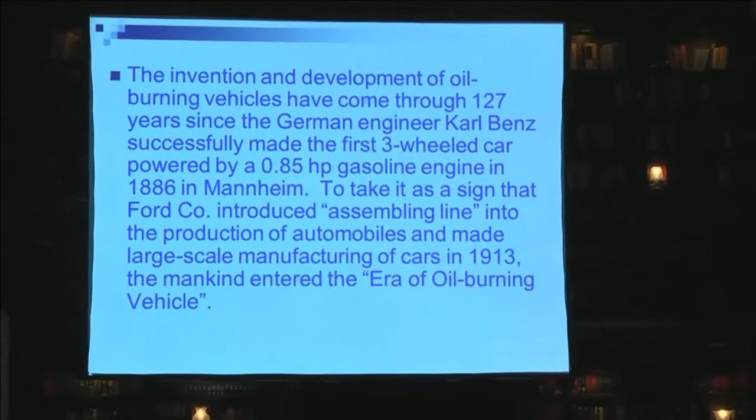Thank you. Creating a new era of alcohol ether fuel vehicles, by Mr. Peng Zhigui. The invention and development of oil-burning vehicles have come through 127 years since the German engineer Karl Benz successfully made the first three-wheeled car powered by a 0.85 HP gasoline engine in 1886 in Mannheim. To take it as a sign that Ford company introduced the assembly line into the production of automobiles and made large-scale manufacturing of cars in 1913. Mankind entered the era of oil-burning vehicles.

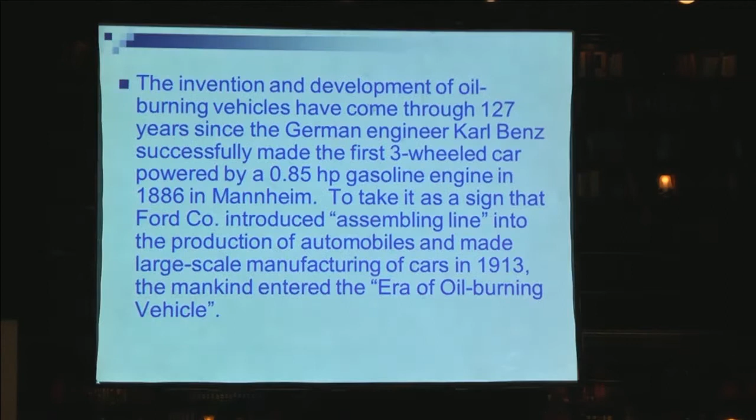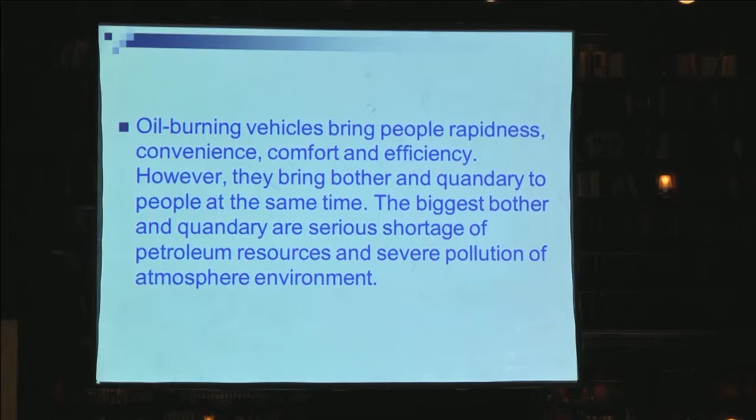At the present time, automobiles have become necessary to people's life and work, as well as high-grade, durable consumables and artworks loved by everybody. The automobile industry has become a skeleton industry of the national economy in many countries. Oil-burning vehicles bring people rapidness, convenience, comfort, and efficiency. However, they bring bother and quandary to people at the same time. The biggest bother and quandary are serious shortage of petroleum resources and severe pollution of the atmosphere environment.

Nowadays, every country is trying to create a peaceful, stable, prosperous, and harmonious era. There should be a clean and beautiful environment for mankind living in that era. Therefore, clean vehicles are a need of the times as well as a need of the people. Chapter 1: Alternate vehicle fuels beauty contest.

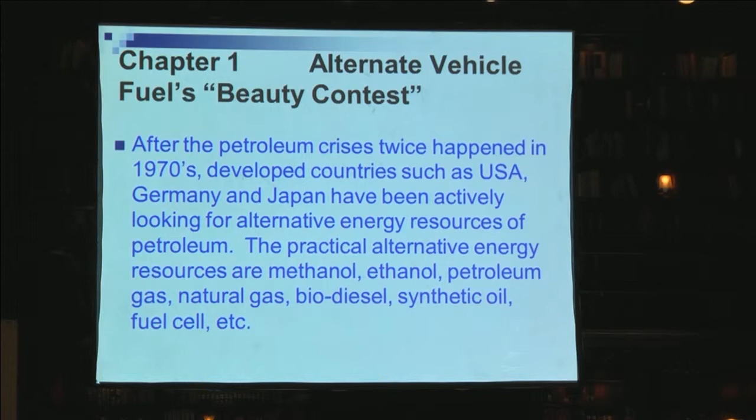After the petroleum crises happened twice in the 1970s, developed countries such as the USA, Germany, and Japan have been actively looking for alternative energy resources to petroleum. The practical alternative energy resources are methanol, ethanol, petroleum gas, natural gas, biodiesel, synthetic oil, fuel cell, and so on. Scientists and engineers in relatively developed countries had made a great number of tests, research, technological innovation, demonstrations, and application promotion, and got remarkable results.

Because petroleum resources are much shorter in our country, the enthusiasm for seeking alternative energy resources is very high. The state government chose ethanol first and made demonstrations and promotion in the late 1990s in 3 provinces. The Shanxi provincial government chose methanol and made test demonstrations and promotion across the whole province.

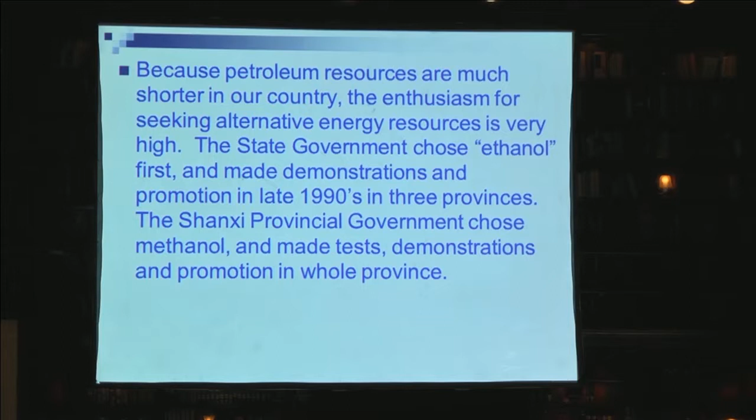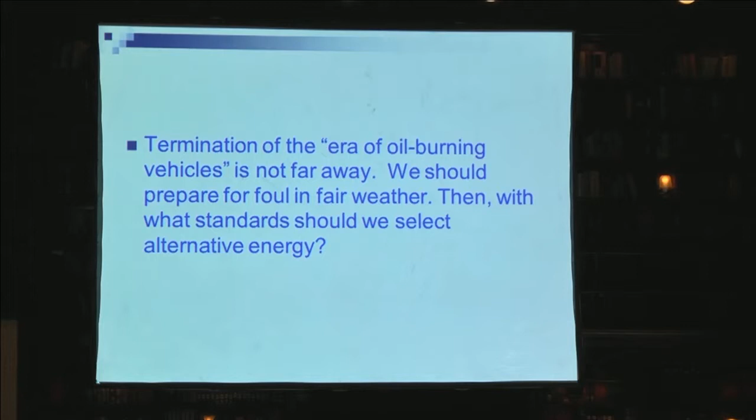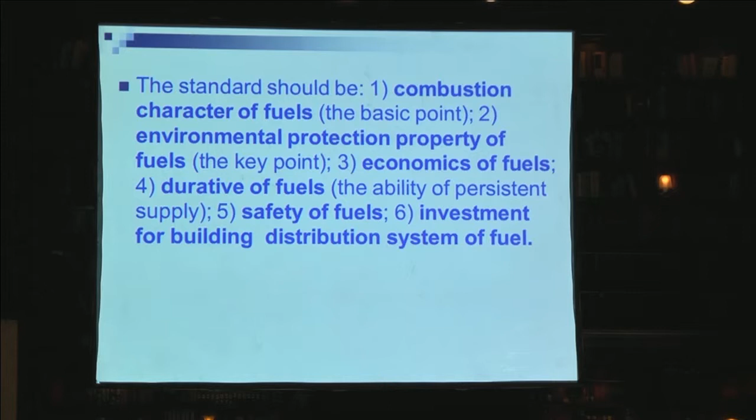Termination of the era of oil-burning vehicles is not far away. We should prepare for foul in fair weather. Then, with what standards should we select alternative energy? The standards should be: first, combustion character of fuel; second, environmental protection property of fuel; third, economics of fuel; fourth, durative of fuel; fifth, safety of fuel; sixth, investment for building the distribution system of fuel.

We have been working with alternative fuels for more than 20 years. It is not so difficult to make a selection. We will borrow the method of a beauty contest from the art circle to compare, identify, and evaluate vehicle fuels. It can be called an alternative vehicle fuels beauty contest.

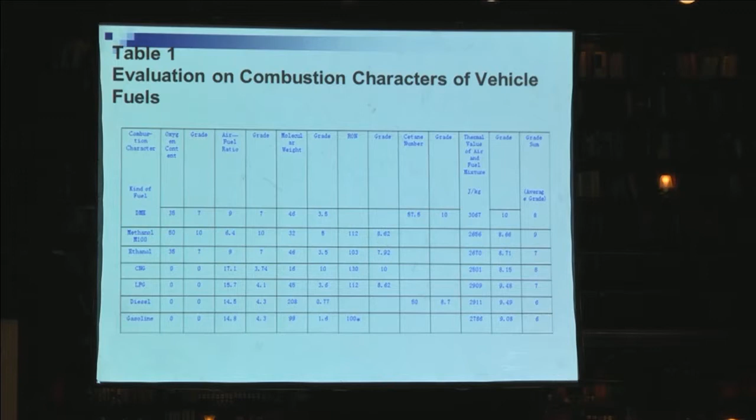Here are some tables in which we make an evaluation of different characters of vehicle fuels. This is table 1. In the first column we can see different kinds of fuel: DME, methanol (M100), ethanol, CNG, LPG, diesel, and gasoline. The different columns show different characters. Because I don't have much time to explain all these details, you can see this table is an evaluation of combustion characters of vehicle fuels. The second table is an evaluation of environmental protection property of vehicle fuels.

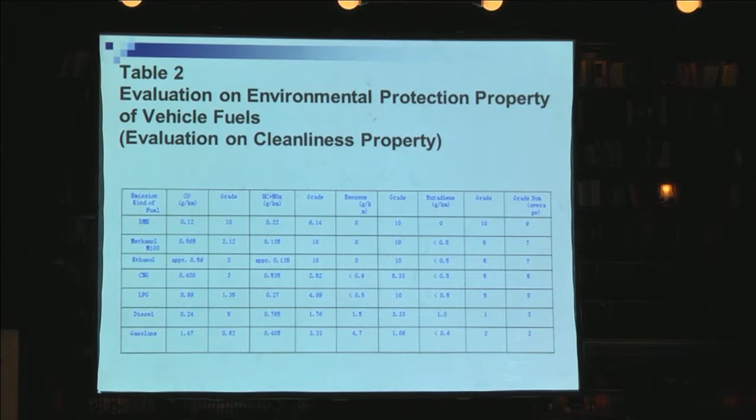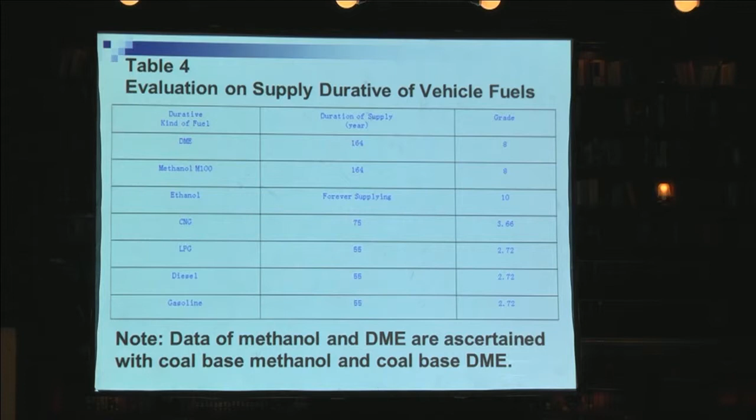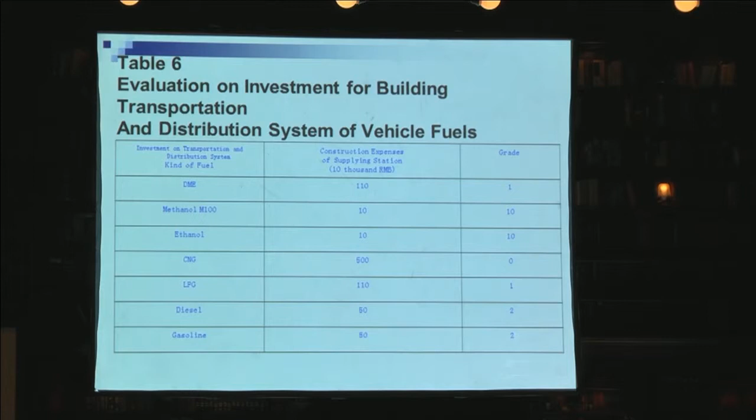Table 3 is evaluation of economics of vehicle fuel. Table 4 is evaluation on supply durability of vehicle fuel. Table 5 is evaluation on safety of vehicle fuel. Table 6 is evaluation of investment for building transportation and distribution systems of vehicle fuel. Table 7 is general evaluation of vehicle fuel.

We give different grades. We can see in the first column the different kinds of fuels, and in the next columns, different characteristics of fuels. At last, we can see the total grade.

In the last column, we can see for DME it is 37, for methanol it is 54, for ethanol it is 47, CNG is 31, and LPG is 26. For diesel it is 20, for gasoline it is 21. So we can see methanol got the highest grade, a score of 54.

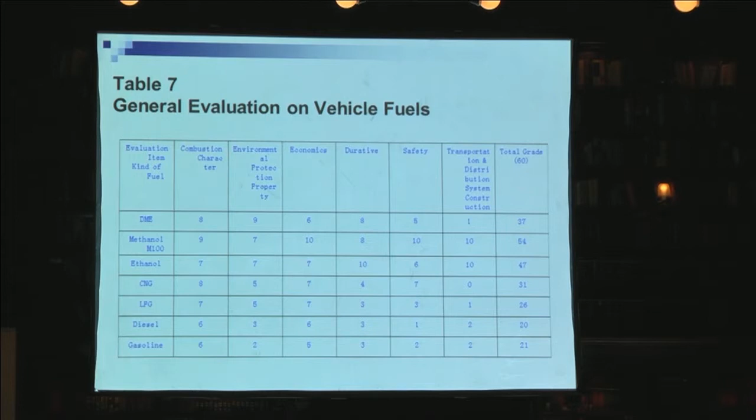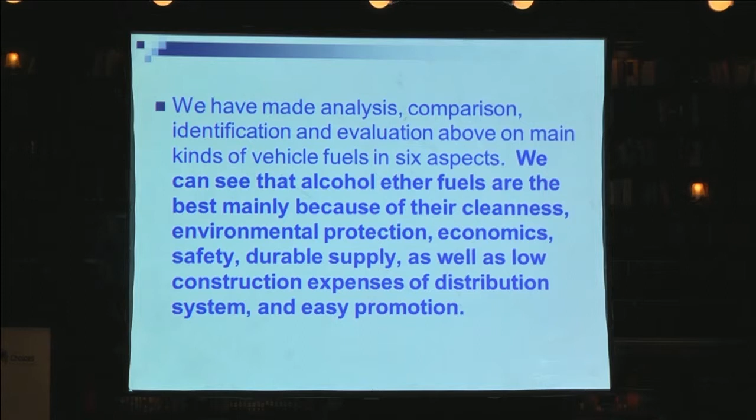After making this analysis, we have made a comparison, identification and evaluation above of the main kinds of vehicle fuels in 6 aspects. We can see that alcohol-ether fuels are the best, mainly because of their cleanness, environmental protection, economics, safety, durable supply, as well as low construction expenses of distribution system and easy promotion.

Methanol is the best among alcohol-ether fuels because of its best combustion character, best economic character, good environmental protection property, and lowest construction expenses of distribution system.

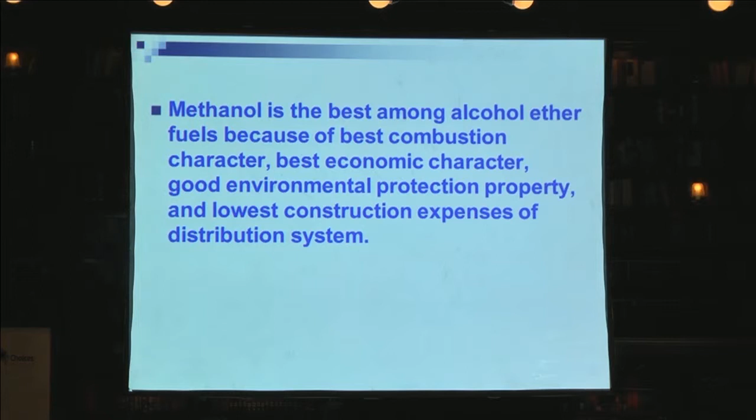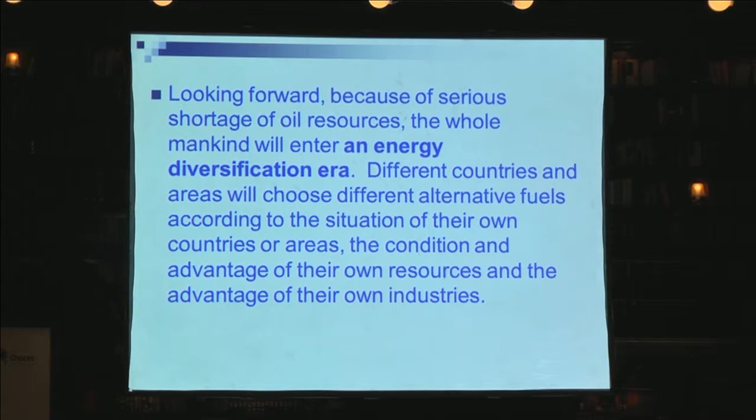Looking forward, because of serious shortage of oil resources, the whole of mankind will enter an energy diversification era. Different countries and areas will choose different alternative fuels according to the situation of their own countries or areas, the condition and advantage of their own resources, and the advantage of their own industry.

Chapter 2: creating actively a new era of alcohol-ether fueled vehicles. Why can alcohol-ether fuels win and become an outstanding alternative fuel?

Besides its excellent characteristics mentioned above, another reason is that it has a lot of raw material sources and can be supplied continuously.

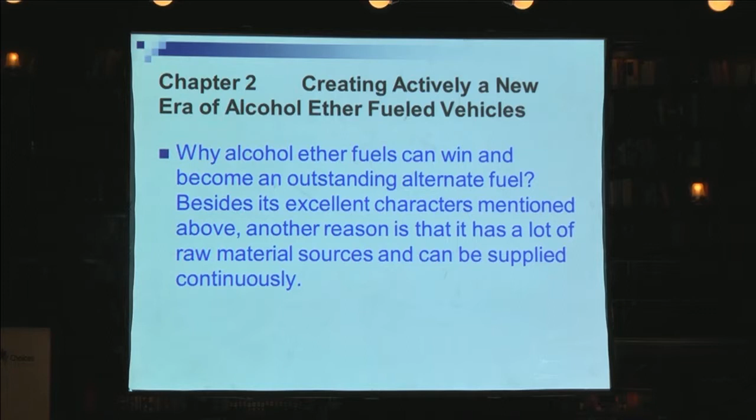Point one: broad and rich raw material sources of alcohol-ether fuel. Tests and research in different aspects indicate that there are at least 7 kinds of energy resources which can be used to produce alcohol-ether fuels. They are natural gas, petroleum (meaning heavy oil), coal and coal-bed gas, straw and stalk of plants, organic rubbish, flammable ice, and carbon dioxide (CO2).

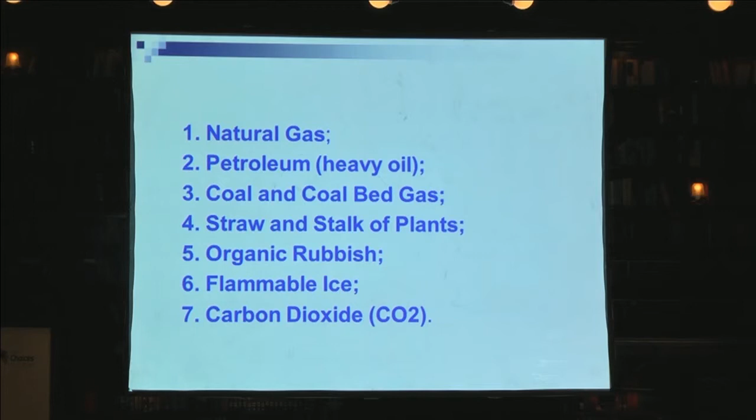To summarize, raw material sources of alcohol-ether fuels are broad and rich. It can help us realize sustainable development. This is the main reason we choose alcohol-ether fuel as the leading alternative fuel.

Second point: the technology of alcohol-ether fueled vehicles is ripe. After the two petroleum crises in the 1970s, far-seeing scientists and engineers from Western developed countries have all been actively studying and developing alcohol-ether fueled vehicles.

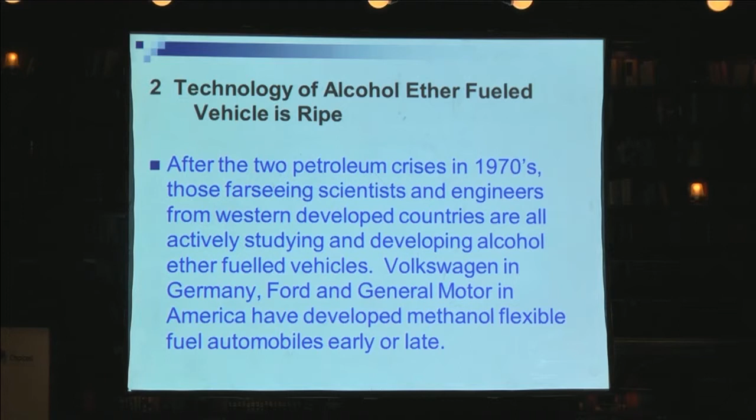Volkswagen in Germany, Ford and General Motors in America have developed methanol flexible fuel automobiles, early or late. The problems of methanol fuels, such as corrosiveness, swelling capacity, and cold start, have been solved on those vehicles.

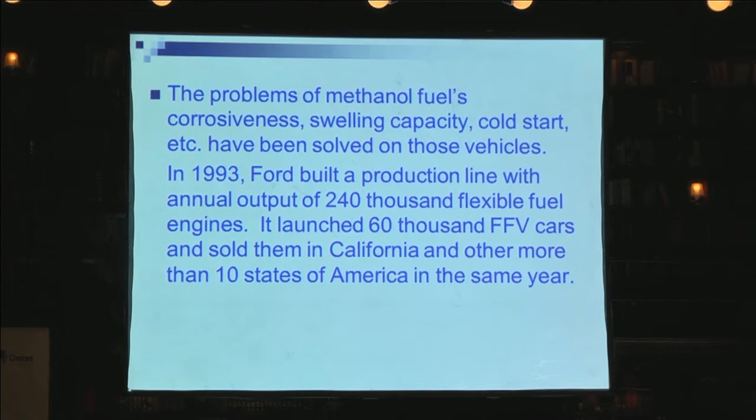In 1993, Ford built a production line with an annual output of 240,000 flexible fuel engines. It launched 60,000 FFV cars and sold them in California and more than 10 other states of the United States that same year. At present, that technology has been basically mastered in our country.

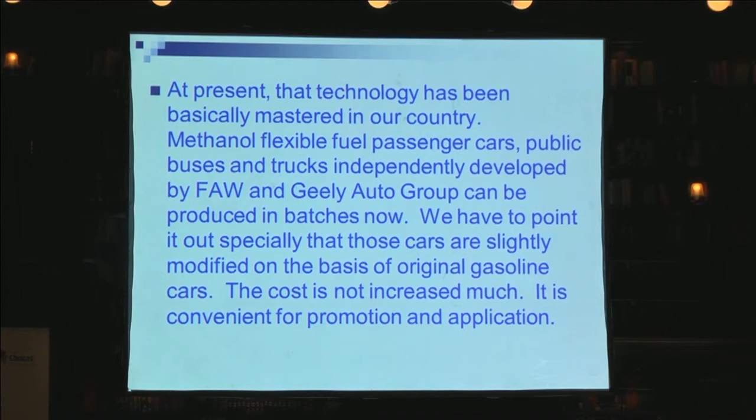Methanol flexible fuel passenger cars, public buses and trucks independently developed by FAW and Geely Auto Group can now be produced in batch. We have to point out especially that those cars are only slightly modified from original gasoline cars, so the cost is not increased much, making it convenient for promotion and application.

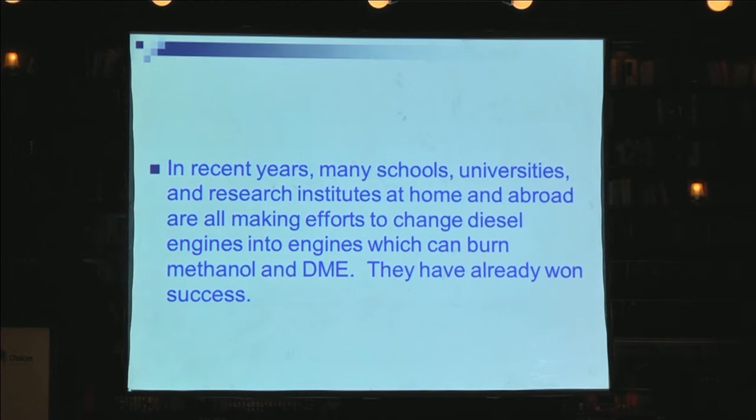In recent years, many schools, universities, and research institutes at home and abroad are making efforts to change diesel engines into engines which can burn methanol and DME. They have already achieved some success.

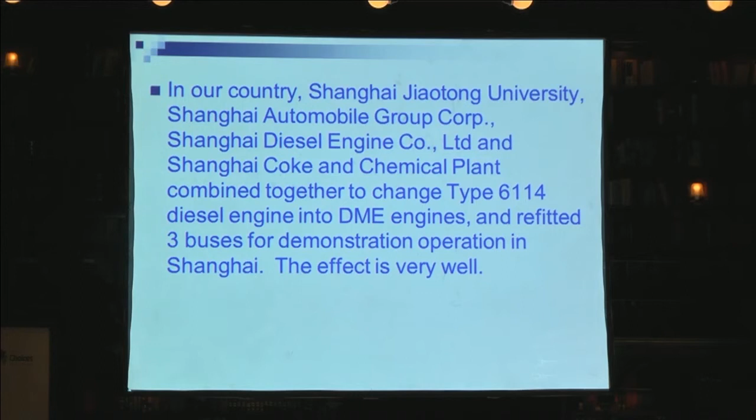In our country, Shanghai Jiao Tong University, Shanghai Automobile Group Corporation, Shanghai Diesel Engine Corporation Limited, and Shanghai Coke and Chemical Plant combined together to change the type 6114 diesel engine into a DME engine and refitted 3 buses for demonstration operation in Shanghai. The effect is very good.

We can see that the speed of studying and developing alcohol-ether fueled vehicles in international society is not slow. The technology of alcohol-ether fueled vehicles is getting ripe. The predecessors from science, technology, and engineering circles in the area of oil-burning vehicles are shifting duty to their successors. The era of alcohol-fueled vehicles is not far away.

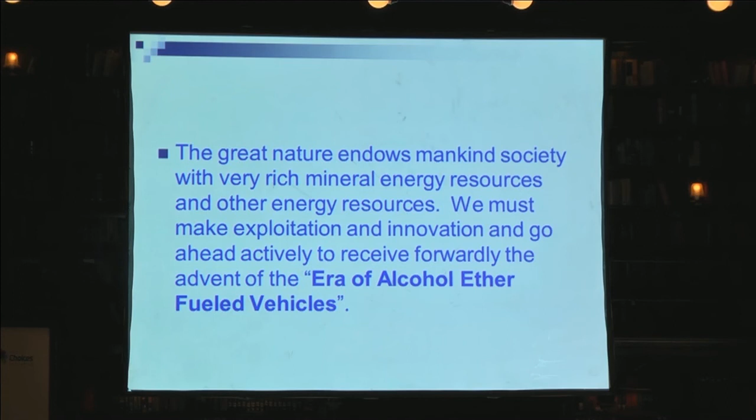Great nature endows mankind with very rich mineral energy resources and other energy resources. We must make exploitation and innovation, and go ahead actively to forwardly receive the advent of the era of alcohol ether fueled vehicles. That's all. Thank you.